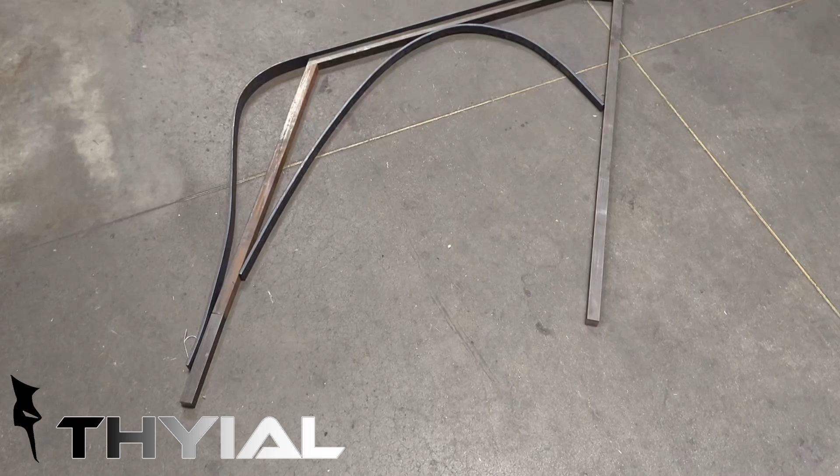This week, I'm fabricating a custom handrail for my girlfriend's parents, and I learned something invaluable along the way. I know, right? The parents. I guess you could say the pressure's on.

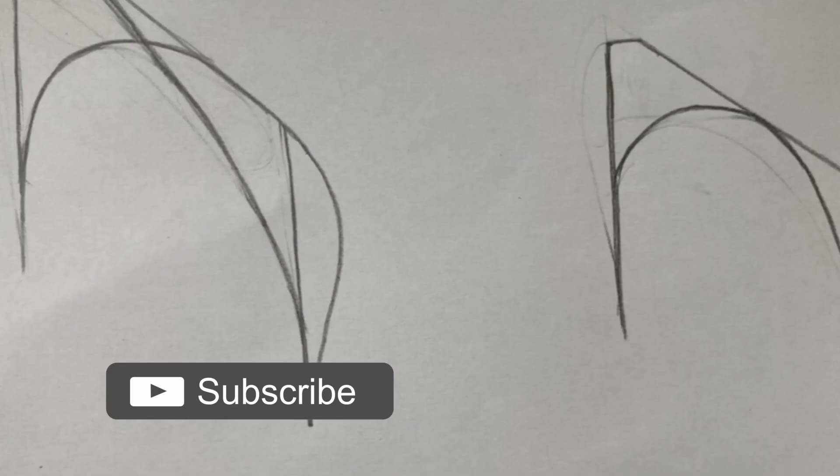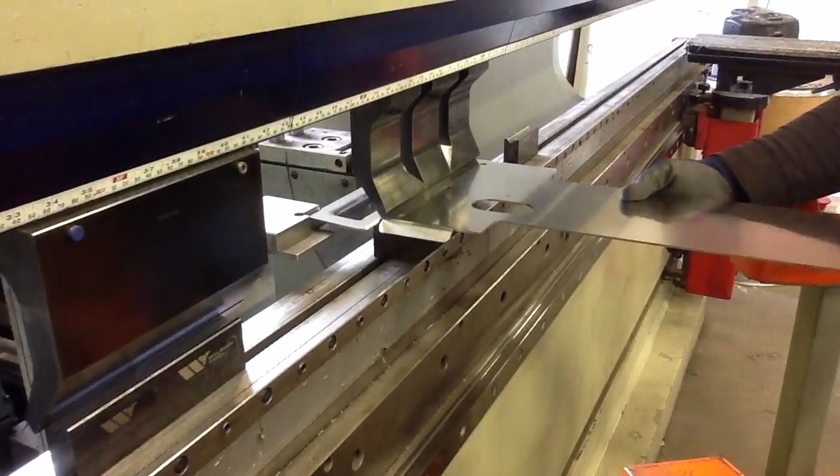We spoke a few times about the specific design they wanted. They sent some pretty detailed photos of this new concrete slab they poured. I was getting a little worried because they wanted something pretty intricate that a machine couldn't necessarily create, and I wasn't even sure if it would be structurally sound. I mean, I'm supposed to be an engineer. Could you imagine if some kid was playing on this thing and all of a sudden, BAM! No more kid. There goes my career.

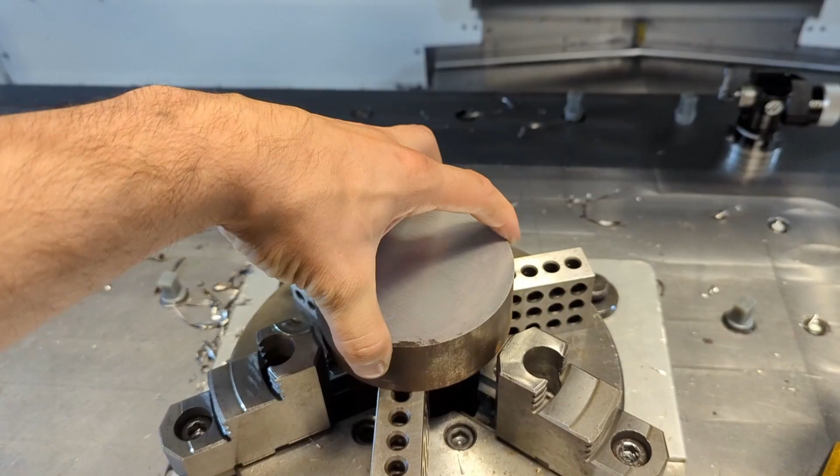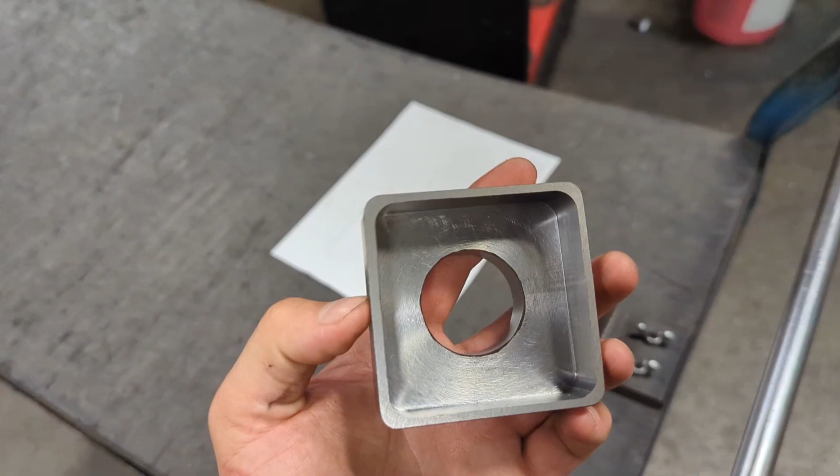Then I got to work on what I thought was the most complicated part of this project, machining these fancy feet covers. Nah, I'm kidding. They actually look like this. So here's what this piece is going to look like. I'm going to need two of them, and it's going to act as the cover to go over the bolted handrail. A little over engineered, over machined here, but there's nothing wrong with that.

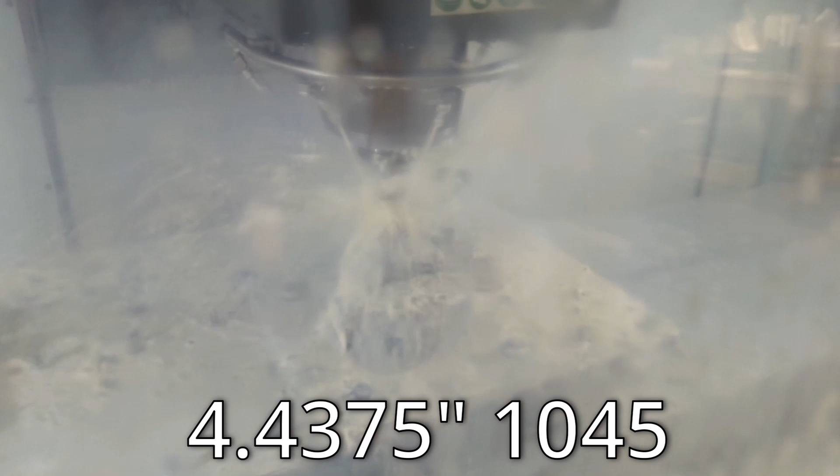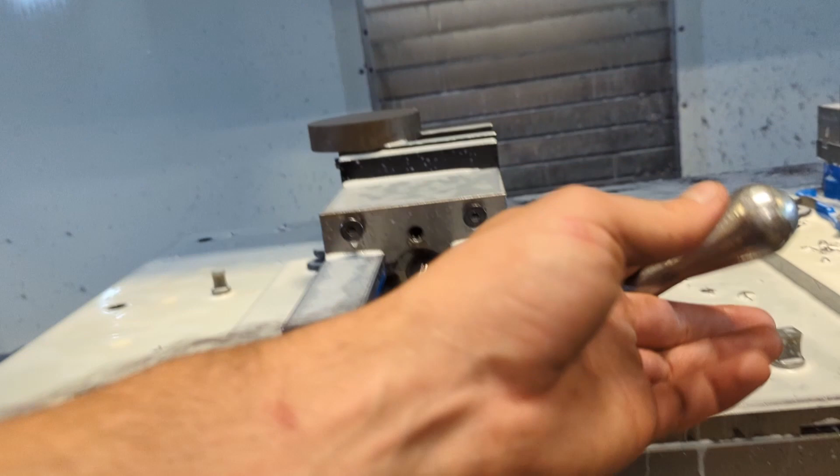Looks nice. For the first operation, I came in and touched off the stock, which was a small piece of 4.4375 1045 shafting. I had to machine this part in two operations. First, I had to make this little square part, then flipped it over and made this other little square part. So descriptive.

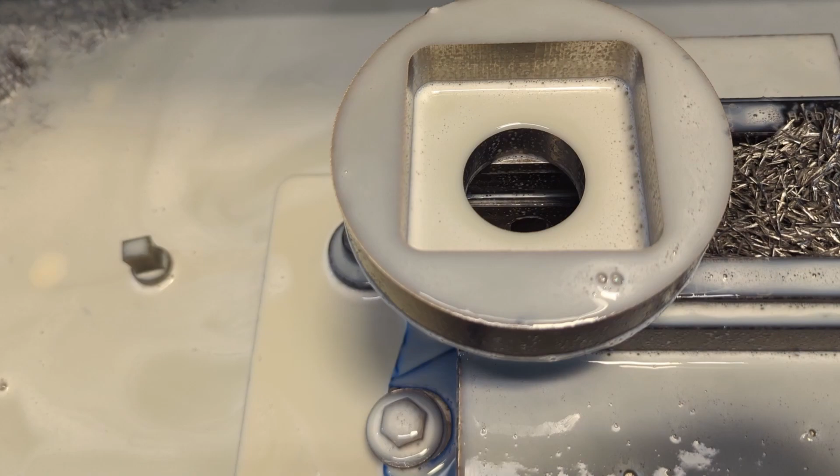I'd go into more detail about machining, but I just feel like it's a little boring to watch. I don't know how titans of CNC make this stuff so interesting. Next, you're going to see me use these giant sheets of paper. What these are is just a one-to-one print of what I'm supposed to be making.

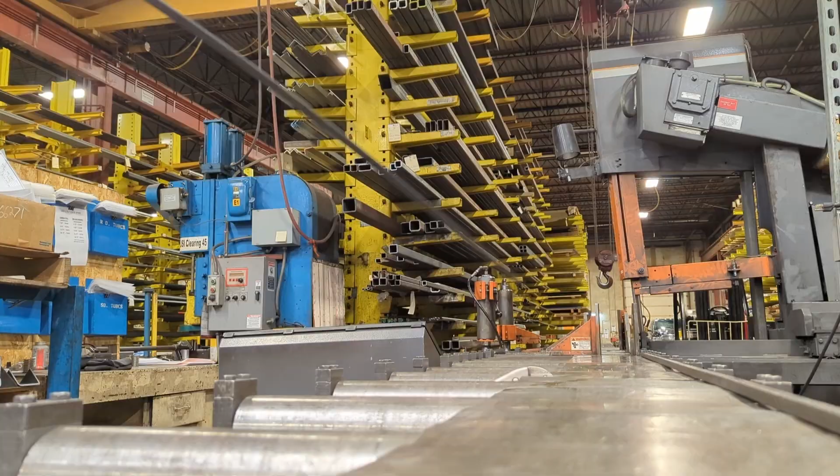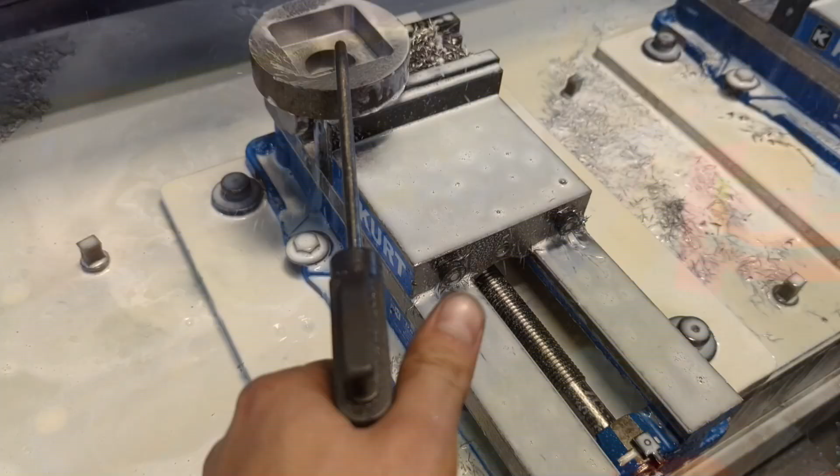You know how I mentioned a machine couldn't necessarily create what her parents wanted? Yeah, so I have access to pretty much any tool you could ever imagine. I'm talking high-end laser cutters that can cut 1-inch steel with an accuracy of less than 5/10, CNC brake presses, a CNC mill, CNC lathes, literally anything you could imagine. And I'm super thankful for this. I've been fortunate enough to land a job where they let me mess around with the equipment a little bit. John Deere's not going to let me do that.

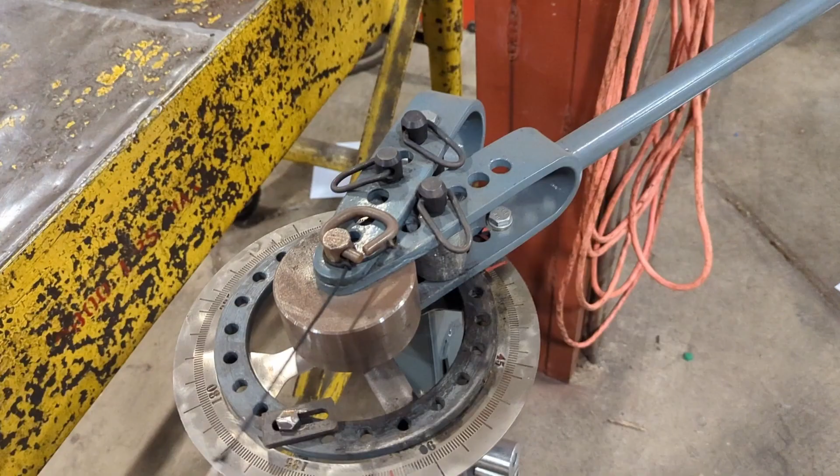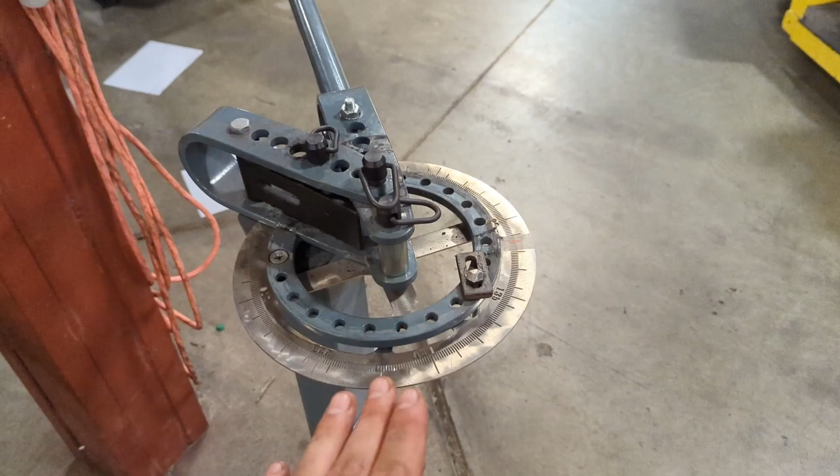So what I'm getting at is that although I had all these tools, none of them could get the job done with the results I wanted. Computer number controlled machines are really good at doing simple tasks repeatedly very fast. However, making things like these complex curves that curve in two directions, in my experience, they're not so good at that. Now, I know you can get a specific machine for this type of work, but it's too specific in its job title to be good at anything else.

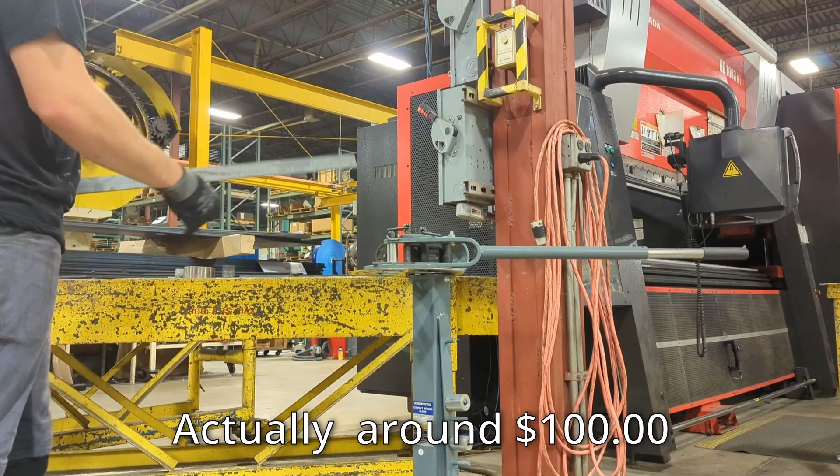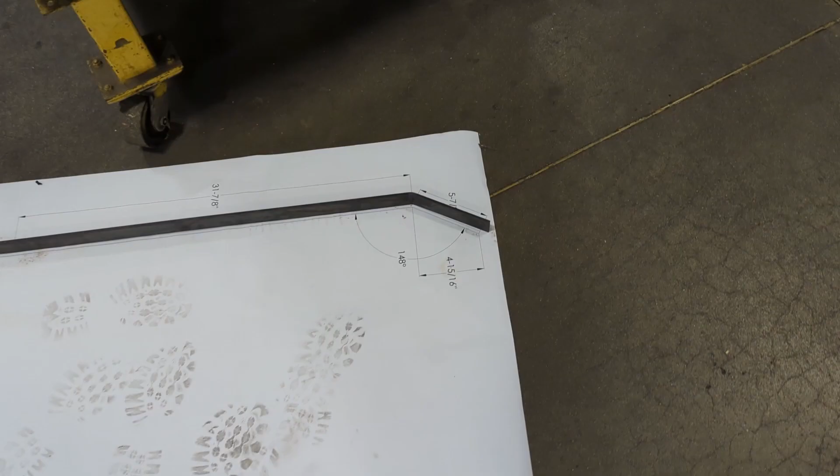Basically, it's not worth the cost for a one-off project. So what we have here is a $100 Harbor Freight bender. I should also point out a forge and anvil would be amazing, which we do have, but I have much more experience with bending than I do forging. So after I put this simple bend in, it was time for the hard part, which, if I can provide some foreshadowing, is not the most difficult part of this build. In reality, the worst part, and frankly quite embarrassing, is yet to come.

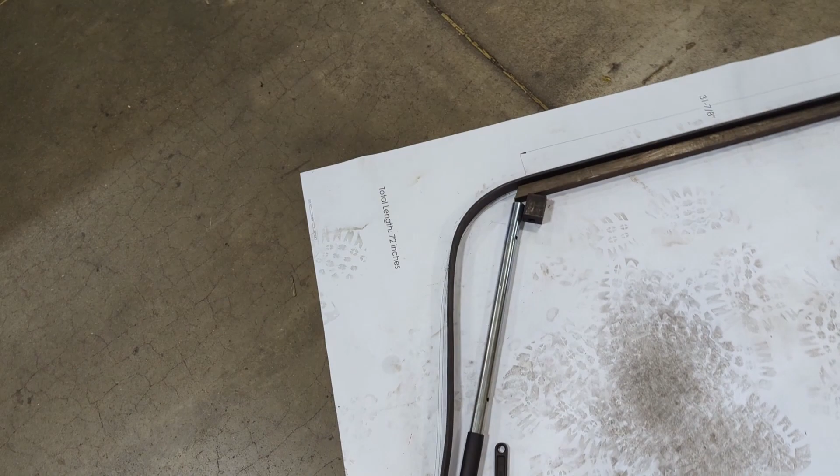The first part, however, was making these curves. It took a lot of practice and frequent back and forth trips from the bender to the hydraulic press to flatten it back out and start again. This part was frustrating because the slightest increase in pressure would overextend the bend and put a kink in the metal. I was trying to get a seamless curve from start to finish, tried to make it seem like it had a natural flow. What I learned from the constant trial and error over the 2 days it took me to figure this out goes back to that old saying, patience is a virtue.

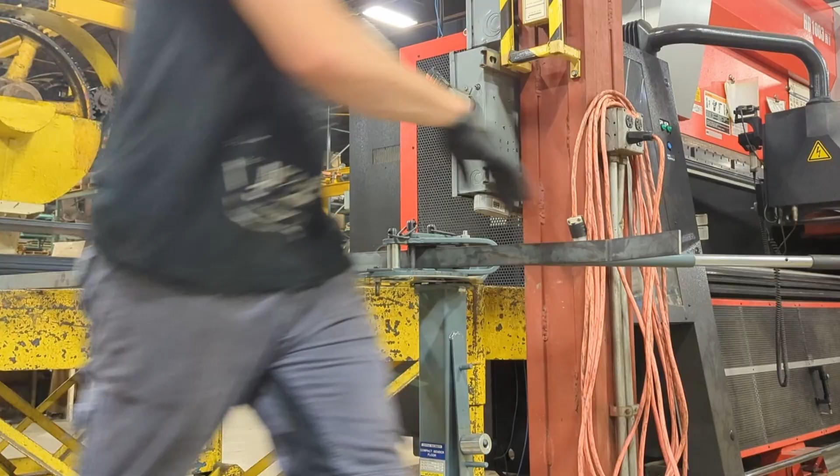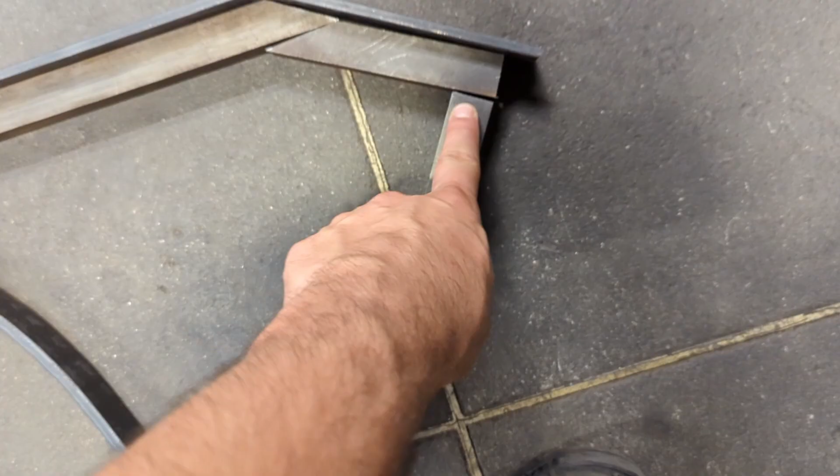And indeed it is. And not only that, but I think I'm starting to learn something that ties in with my bigger problem I had later on, and probably still have as I'm editing this video, but we'll get to that later. So, here's a mock-up of the tedious work that finally came together, work which I was quite proud of. I actually really like the design I came up with. It's simple yet elegant.

For the next step, I just had to put everything together. I started off by marking and cutting these bevels.

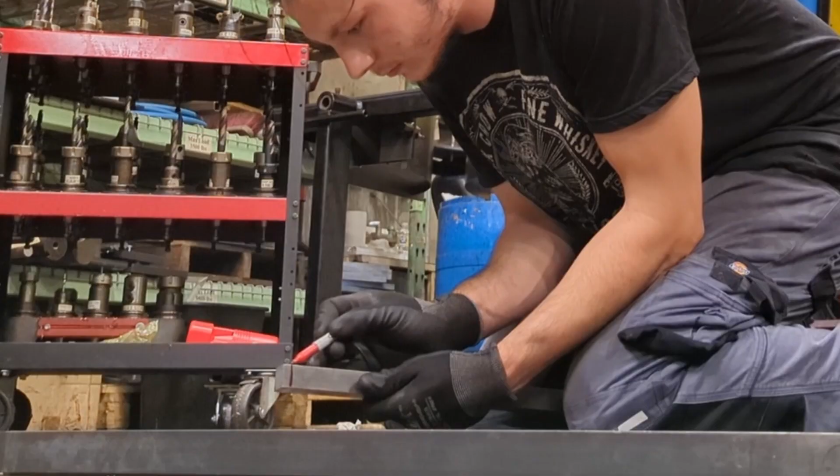Now I just got to cut the bevels so I can put more weld in there to attach these. Everywhere where there's red, I'm going to cut out.

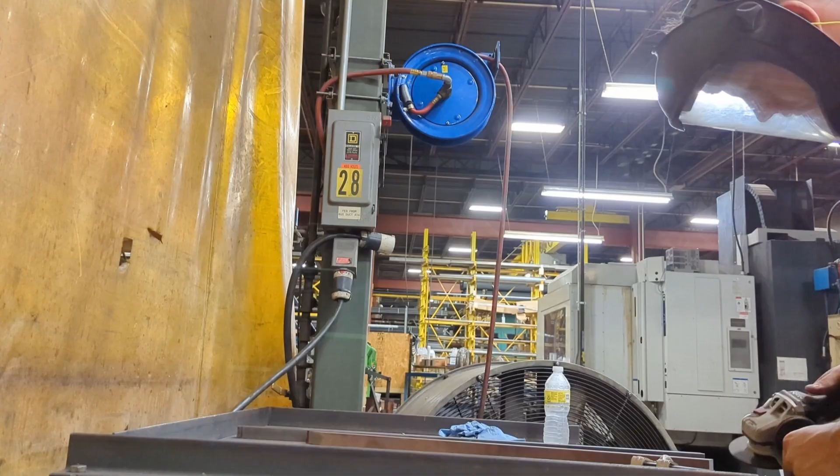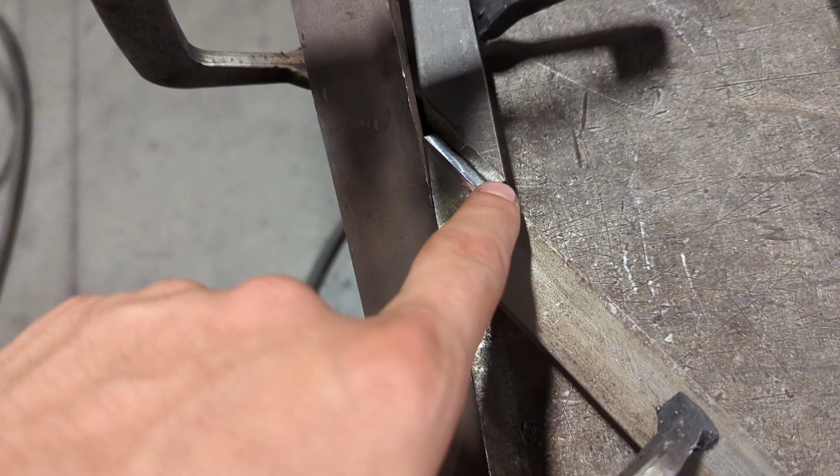Here's what I was talking about with the bevels. I beveled each end to give me a bigger slot to weld, because this is 1-inch material here. If I were to just put a small weld bead on top, that would break in a few months, maybe a year or so, especially if this gets a lot of use.

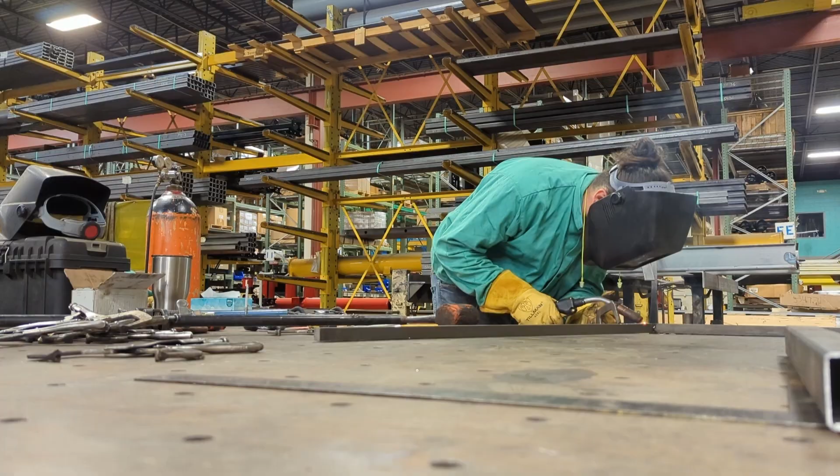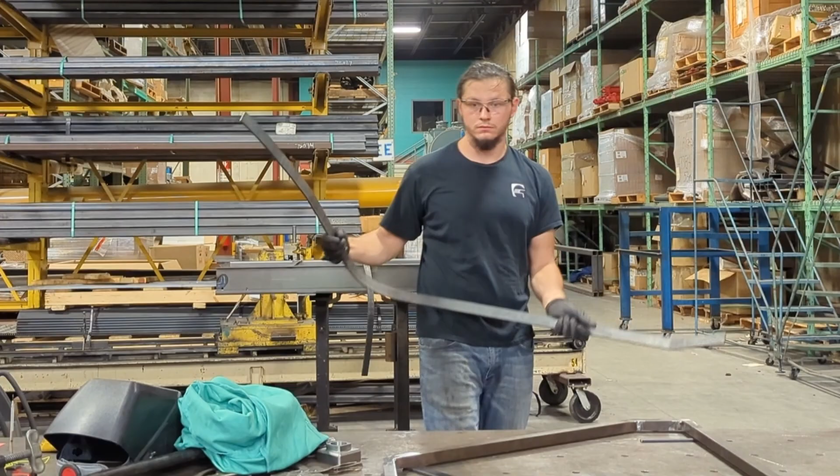After welding the main frame together, I had to go back and grind the welds off, not to just make it look better, but also so the rest of the pieces would sit flush to the frame. To put the rest together, it was nothing fancy - just propped the frame up on some spacers, clamped everything together, and gave it a solid weld.

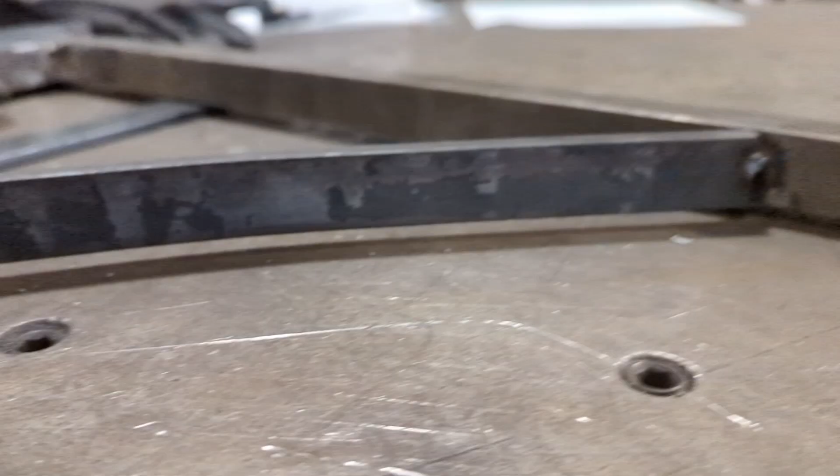I'm sure it wouldn't matter too much, but I like to try my best. Since code regulates railing height should be between 34 and 38 inches, we gotta chop some excess off.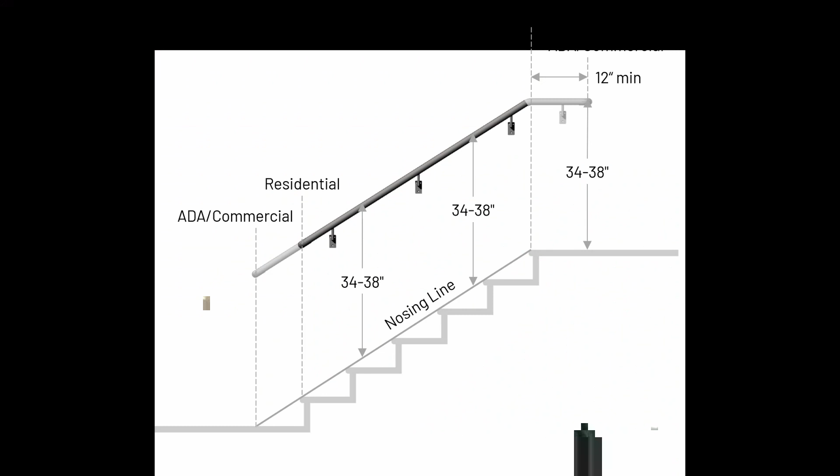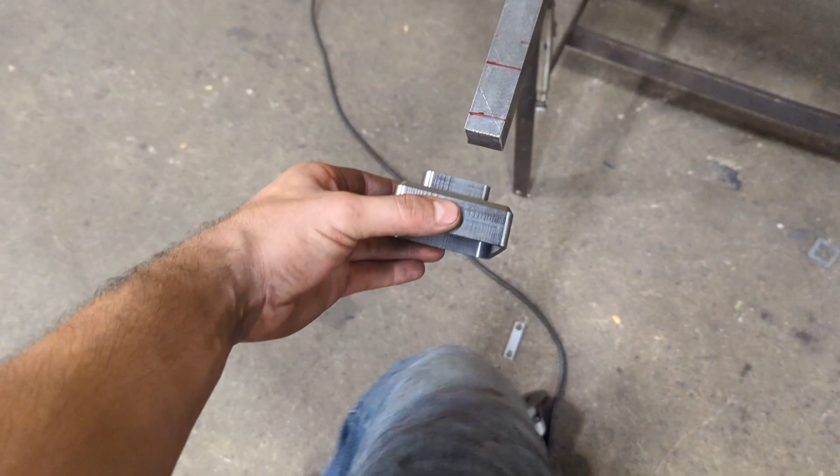Okay, so I think I figured out a way to do it. Pretty simple - just gonna come in here and cut 2 inches off the bottom of each one. The only problem I might run into is I actually made this curve here a little longer, if you remember, and the foot cover might run into the weld there.

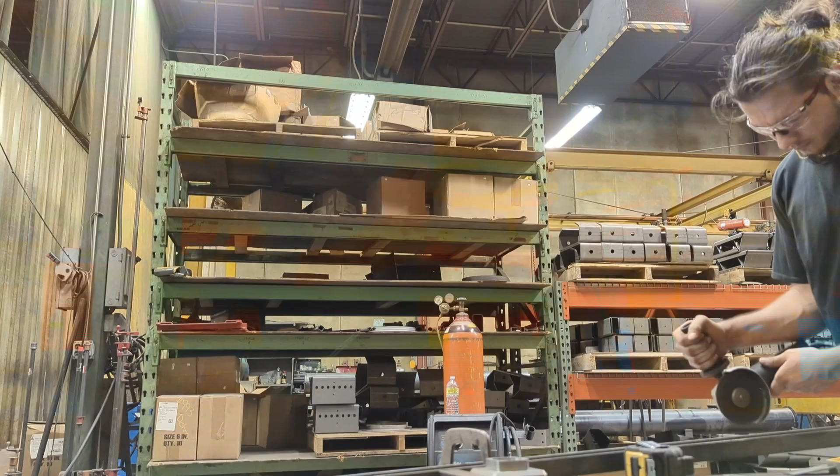So I'm gonna be straight up here - my phone died, and I kind of finished the whole thing, so there's no footage of that. All I did though was weld the feet and paint. Nothing too fancy. So this is the end.

But you're gonna ask, wait, what was that big problem you were gonna tell us about? Well, I figured not everyone wants to see a big, handsome Native American cry about his feelings. So for those who don't care, go check out the rest of the videos on my channel.

Otherwise, here we go. Okay, gonna be honest a second time here - I just got done recording this segment, which was like 25 minutes long, where I explained my story of what happened and what went wrong during the install of the railing. But that's way too long for a video like this.